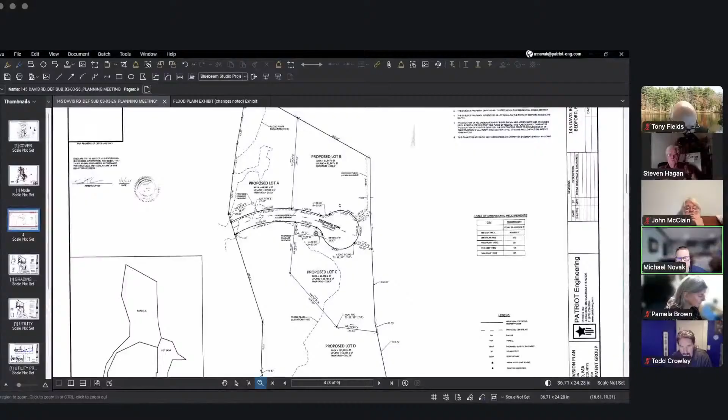Based on those ORAD determinations, and to give an idea of layout, the dark dash line is that floodplain, just in case anyone wants to follow that. Again, Jeffrey Circle coming in through here, we're bringing the right-of-way through and getting it out of the access easement to allow for a better shaped lot.

Slight grading up and down, low points at the beginning of the connection from Jeffrey Circle to our proposed right-of-way, and then we have a low point in the middle and back up. I can show you a profile in a second with drainage systems to capture both of those runoff areas through catch basins and manholes.

We're also taking advantage of as much as we can in regards to some naturally occurring low spots, and we've created some grass depressions here and here because we've been made aware that there's a lot of water issues out in this area, and we've been asked to really try to make improvements above and beyond what's required, so we've really tried to do that.

The result of these two additional grass depressions also allowed me to fully address all the drainage comments from DPW as well, which has been included in this revised set.

The utilities layout is relatively easy because we already have an existing water and sewer line that runs through that easement. We're bringing a water line off to allow us to set a hydrant at the end of the cul-de-sac, services from that, and we're connecting where we can to the existing sewer line as well to minimize disturbance as best we can.

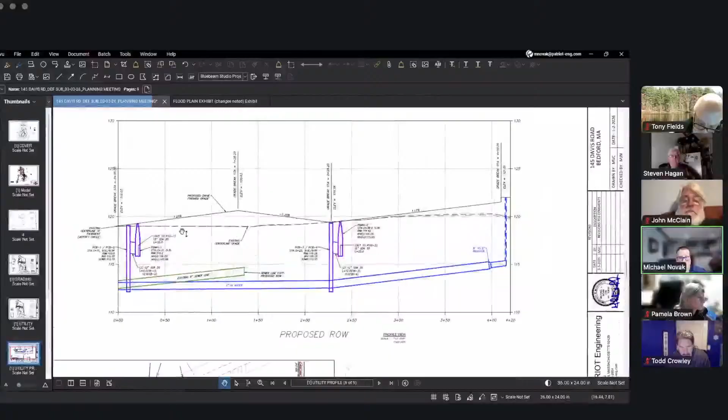You can see the profile here of the roadway. Again, Jeffrey Circle starting here, catch basins prior to leaving the site, high point, low point, 1.25%, a little under 1.5% up and down, and then slightly over 1% to the top of the cul-de-sac. Very, very shallow, very easy.

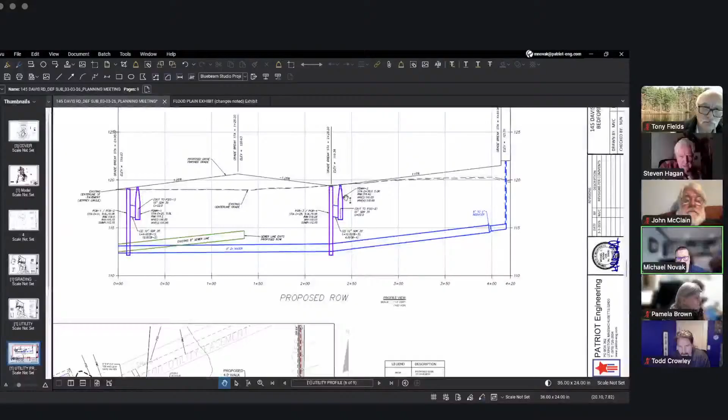Won't have a lot of speed with water runoff, so we'll be able to capture all of the drainage. We're also proposing porous pavement for everything as well to double up on really trying to reduce any runoff or improve any situations that we can with our development.

And we did provide a landscape plan as well. One of the comments looks a little odd because DPW commented that there shouldn't be any trees planted within the existing easement, so we've removed those and added as many as we can outside of that, still meeting regulations. We'll have deed language to make sure that there are no trees planted after the fact in the easement per DPW's request.

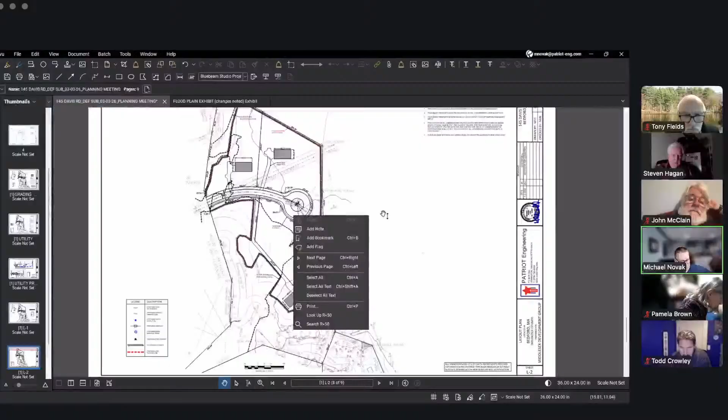We also provided, sorry, didn't mean to scroll into zoom, just an exhibit of a layout of potential building envelopes with driveways. Again, these driveways will be porous to help mitigate drainage, and just an idea of a 65 by 35 buildable area as it sits and how they could sit on the plan outside of the resource areas within setbacks, just for a visual aid to understand, because these lots, especially the bottom lots, are large, and there's a lot of resource area in and around them.

So we felt that would be helpful. I think that's a very brief overview of the layout. Happy to answer any questions. The applicant is here along with Pam, and we have Rich Kirby from LEC if there are any specific environmental questions as well. So with that, Mr. Chair, I'll turn it to you.

Thank you. I'll ask one question and then open it to others. You're saying it's porous asphalt, the main road and the traffic circle, as well as the driveways? Porous hardscape, it's asphalt, yeah, porous asphalt. We really wanted to make a very hard effort to improve drainage with any of this development. Thank you, you're welcome.

Questions or comments from members, from Tony or Catherine? While they're thinking, any from members of the commission? Todd, you've got your hand up.

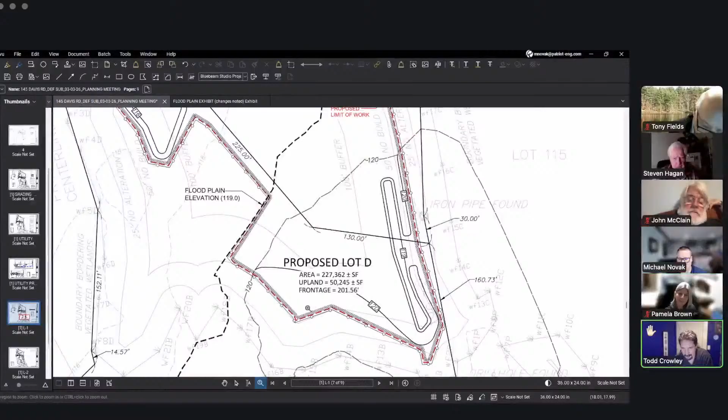Yeah, and I think I asked this last time too, I apologize, but I'm just confused about the lot lines looking at this for C and D down below. So it's like D has a super long driveway, is what you're saying. It does. Again, the effort is to minimize as much disturbance as we can in the floodplain. How large is lot D? I can't read it, I'm sorry. Sure, one second, let me know when you can. Okay, now I can read it, yeah. Okay, thank you.

Okay, Todd. All right, Chris Gittens has joined us and has his hand up, followed by John. Chris, you have the floor. Thank you, I apologize for joining late.

Has FEMA issued relief from this area being within the floodplain? We will need to still file with that. We're trying to get through the revised ORAD, and then that's the next thing that we'll do. Okay, thank you. You're welcome.

John? So this easement runs directly through lot B, right? Yep, sorry, I hit the wrong button. Bear with me one second. It's fine, there we go. Through the middle.

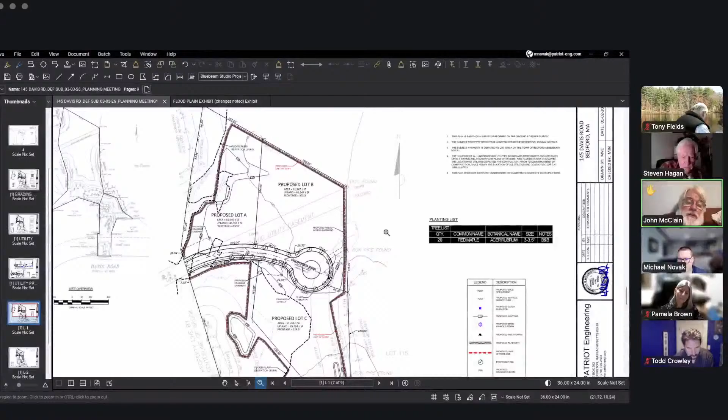I'm not so much worried about the utility part, but I am wondering if the access part, if we ever try to exercise the access part, if that's going to create a problem where whoever owns lot B is going to claim that they never knew and they don't want people traipsing through the middle of their property. Does staff have any insight into how that generally works and what we can do to mitigate?

I can comment if Tony or Catherine don't have a comment. I would just say that the access right seemed a little unusual, and we weren't clear whether it's of any current likely use. I'm not sure if we've delved into it far enough. I think we might have hoped for some comment from DPW about that.

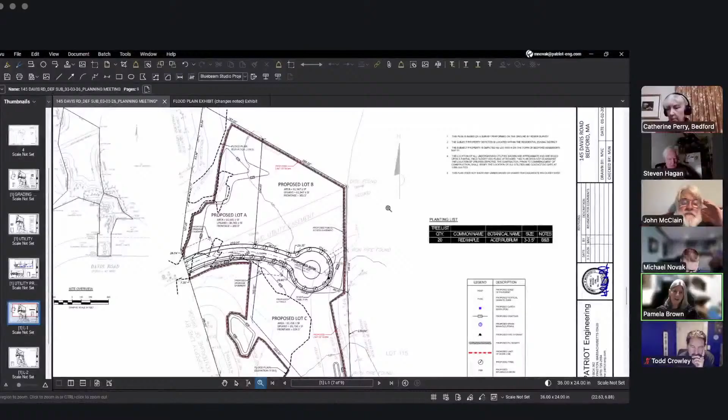Mike, do you happen to have a sheet with the house locations on it? Yeah, that would be crucial. Well, these are possible house locations, right? These are, correct, yeah. Are you not allowed to build on top of the easement, I assume?

You can't interfere with the rights that are created through the easement. So if it needs people to be able to go through it for that width, then you couldn't put anything that blocked it. Okay.

Does someone have two devices on? Because I think that's usually what causes the echo, like a phone and the computer. Well, it seems to be better.

Just a quick additional response to that: you're correct, these are hypothetical proposed house locations that could be shifted. As far as the easement, I actually haven't, I'll have to look for it. I don't think I've read the written easement to see what restrictions there are. DPW has asked, and we've respected, that there be no trees or structures within the easement. But that said, in terms of a homeowner knowing, Mike just alluded to it, but I had suggested, just because of the no tree planting as well as fences or other structures, that we actually incorporate that into the deed. But anytime someone buys a home, you may be aware that there's a title examination run. The easement will come up in the title examination. It'll also be referenced in the deed itself. So people should be aware.

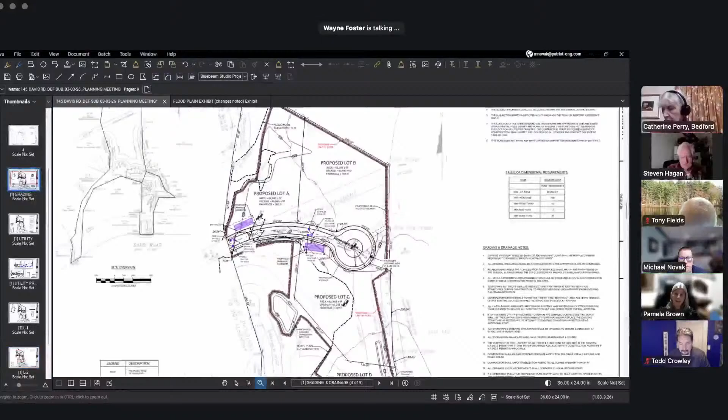I was only saying because I know that Luigi and Lucia at 24 Jeffrey Circle, we don't have sidewalks in front of our houses, and we want to talk to somebody before we put them in, because then we've got the creek and then we've got the rest of the side that doesn't have it. So thank you.

Right, and then your last question - the zoning, which is fairly new, but the current zoning does allow a 2-family dwelling to be constructed on a lot by right. So hypothetically, yes, these could be 4 lots with a 2-family. They'd be townhouses probably on each lot.

Okay, because then you're going to most likely increase the parking situation as proposed on these maps. The driveways are thin, extensive, but total square footage - I don't know if porous asphalt negates the calculation on the square footage, but okay.

Yeah, I'm just concerned about the amount of traffic. I think the town may also have to plan to do tree work more regularly, because in 2025 we had 2 trees come down at different times that closed off this end of Jeffrey Circle. In 2024, 1 tree came down. I know that's not the builder's responsibility, but we may need more tree evaluation.

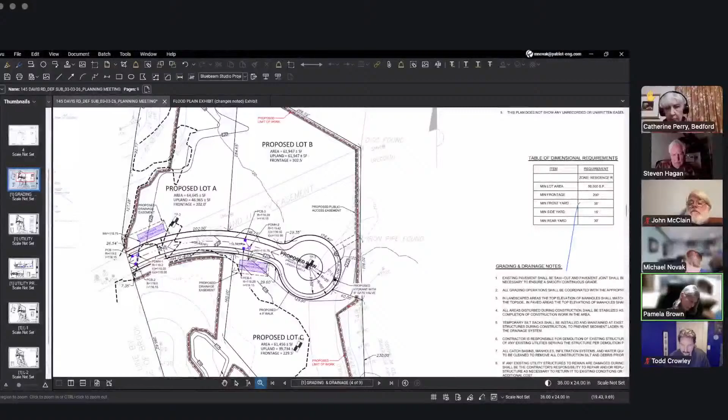Hi, my name is Maria Alice Mastronardi, and I am a resident at 24 Jeffrey Circle. I have a couple of questions.

One is about drainage. Prior to the new pavement on Jeffrey Circle, the water at the end of the road was sitting, so there was a lot of water accumulating on that side of the road. There is no drainage system on Jeffrey Circle on this side - the last drainage is approximately at Madeleine. So DPW, when they placed the new pavement, regraded the road so that it drains properly away from our house. Now my question is whether the catch basin is enough to collect all the additional water coming from the new subdivision, because it is a lot.

And why didn't you consider a drainage system towards Davis, for example, or towards other areas? The other question I have is during construction - I'm wondering how the road is going to support all the construction vehicles, because the new grading is pretty much what is draining the road at the moment.

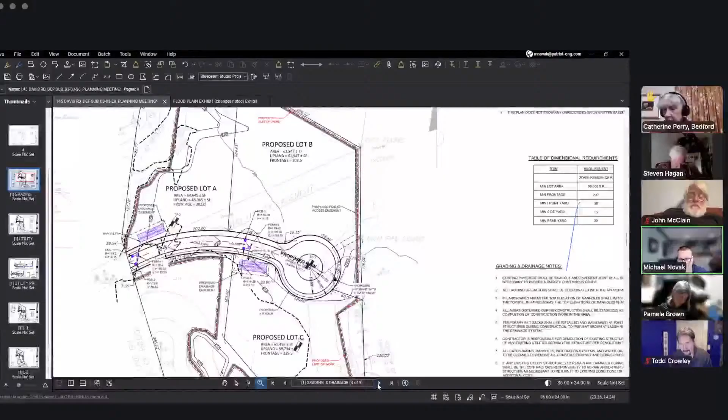If I can jump to this, you can see that only about the first 125 feet of the road actually pitches back towards Jeffrey Circle. The rest of the road all pitches internally. So we're only talking about the first section, basically from right here forward - the entire road does not go towards Jeffrey Circle, it's just the first 125 feet or so.

And again, based on the shallow slope and the porous pavement, there won't be a lot of velocity in that water. The catch basin should be able to handle anything that does make it to the end of the road.

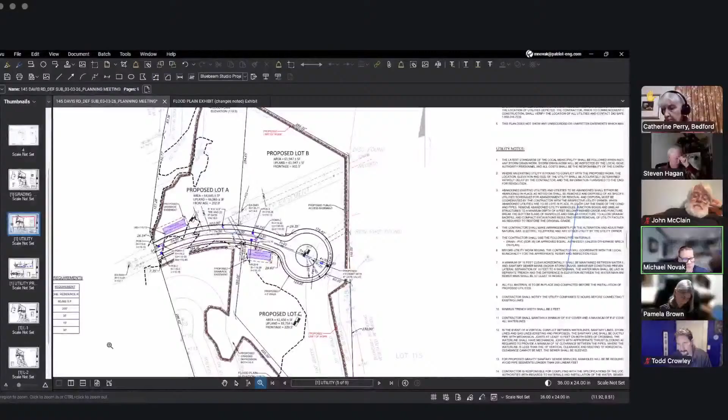Now during construction, obviously there won't be catch basins immediately. We have proposed - I believe I have that plan - a construction entrance and a turnaround area for fire trucks. That was one of the comments we got from fire and DPW, to allow any emergency vehicles in and the ability to turn. We've also dedicated a parking area for construction vehicles to maintain that access.

That small section of entranceway, the construction entrance, will certainly dissipate any water coming that way. But during this time frame, the drainage will function as it exists now - where the water goes now, it will still go there until we get the roadway in. We can certainly make sure it's pitched so there is no runoff, or at least minimize as much runoff as possible towards Jeffrey Circle during construction. This will also be monitored on a weekly basis because of conservation issues. So there's some safety and some belt and suspenders built in.

I apologize, I don't remember the last one - I think it was tree work in Jeffrey Circle, something along that line. No, it was about... Thank you for answering my question.

Sure, it was about the narrow road. I remember that there's an existing regulation where Jeffrey Circle is already longer than normal - it's already an exception - and that will be made even longer and narrower. So this would be an exception, and I was wondering, would we still be able to guarantee safety with this new addition?

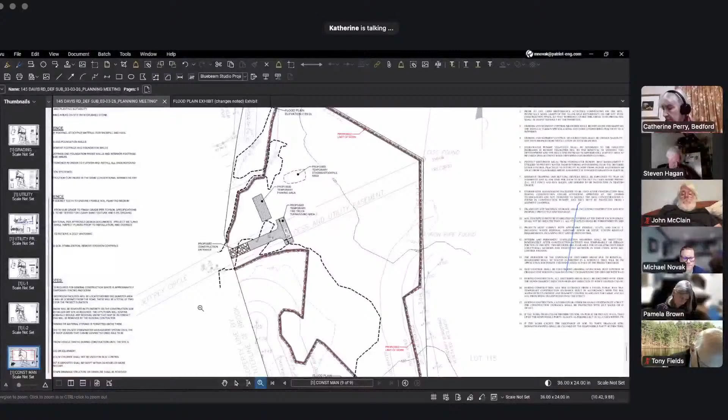Okay, so I just want to highlight the conditions that I put in place that the board will take into consideration before granting any approval. Yes, we will. This is a question for Mike, because we spoke directly about water mitigation. My biggest concern is not so much the stormwater runoff, but mainly when the Concord River floods, this area tends to get flooded into the whole neighborhood. So what has changed since we spoke about mitigation?

Sure, happy to. To confirm, we did have an offline Zoom to review in depth the drainage and how this would function, so they could feel more comfortable understanding the plan. Since we've spoken, two things: if you recall, there was a small grass depression in this area, and with the floodplain change I've actually created a larger area. So anything running this way is going to get settled in here, and I've added storage - drainage storage, or water storage, flood storage - all through here.

Which is larger than what was previously proposed. In trying to address those efforts, I added this mitigation here as well - again, it's a grass depression, and really what that means is more volume, more storage for water to stop and stay here, or to come this way and have a place to go without rising around. We are limited in how much area we can disturb within the floodplain, and I've come very close to that number, but stayed under - there is a limit. So I've tried to really increase flood storage beyond what's out there now, while staying within the bookends we have to stay in for development.

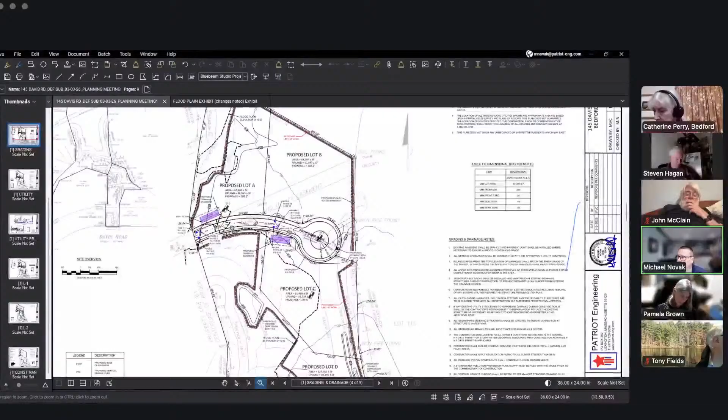So those are the two big changes, along with - I'll reiterate - we've really tried to take the water into the ground before it can run off and create any additional flooding or contribute to any other low spots beyond the site. We're reducing runoff pre to post for all directions that's required. So that's kind of the overview. We've definitely tried to make some improvements and take into account your concerns.

Okay, thanks, Mike, for that.

Follow-up question to that: I appreciate that you added a depression by Lot A, Lot B over there. My concern is that depression closer to my property down on the bottom, because our property down here is already the lowest point. So more water coming down here would not be something I am comfortable with. I would be more comfortable if you tried to look at options to divert the water where the cul-de-sac is and further out east of there.

So if I could, that isn't necessarily because I'm directing more water in that direction. It's to create the ability to hold more water in that area, to alleviate any water coming towards you. That was the intention of that. It's not necessarily something I need to make my drainage work, quote unquote. It's more about trying to address your comment and allow for more storage on our site to alleviate, or hopefully alleviate, any increase that you would see on your end, if that makes sense.

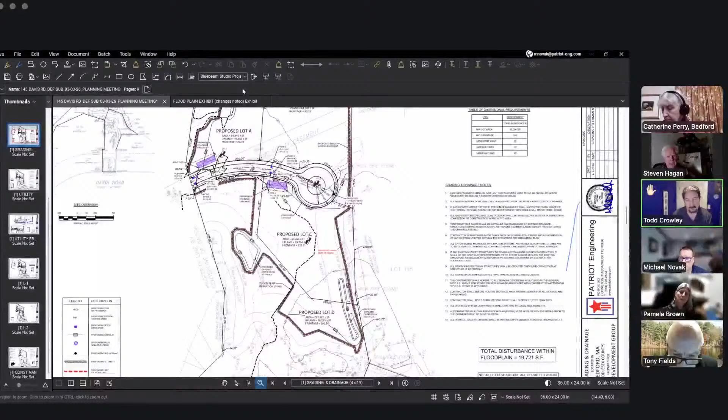Well, I think what we're doing is moving to continue this to the April 9 meeting. Between now and then, the applicant will notify us if they feel fully prepared to be in front of us. If that's all true, then will the applicant agree to continuing this hearing to the April 9th meeting of the planning board? Yes, we would like to continue.

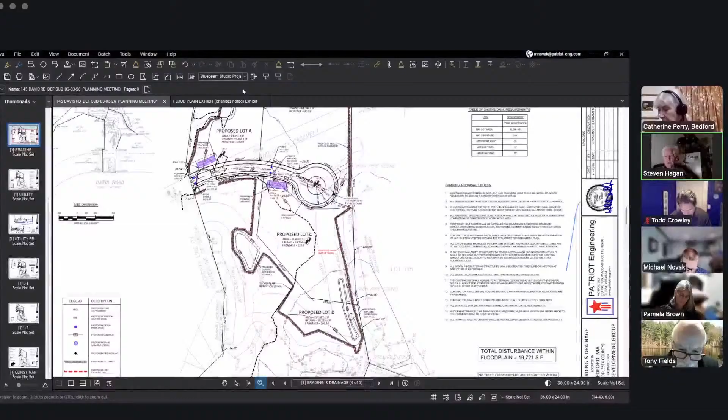Okay, all right, I need a motion from a member of the board to move the hearing for 145 Davis Road subdivision plan to the April 9, 2026 meeting of the Bedford Planning Board. So moved. Thank you, John. And a second? Thank you from Dawn. And roll call vote in that order: John? Aye. Dawn? Aye. Todd? Aye. Remote participant Chris? Aye. And the chair votes aye.

All right, so we will see or hear from many of you in about a month or so. In between there's town meeting, town elections, and all sorts of stuff, and the ConsCom meeting tomorrow night. I will see some of you tomorrow night. Yeah, I think I recognize you, Rich. I may be seeing you tomorrow night. All right, thanks, see you tomorrow night. Thank you. Yeah, you bet. Right, yeah, no, I've read over it already quite a bit.

229 Old Billerica Road, 6 Michael Bitkin Way, request for release of a lot from covenant.

Who would like to speak on this subject? Or who is going to, whether or not you'd like to?

I will. I think, given where we've been with this, it makes sense. I didn't see a huge issue personally with removing this lot from the covenant. But the related issue is what I had originally wanted to do when we filed this back in November: two steps. One was to remove the two lots from the planning board covenant for financing reasons and others. But related to that is the anticipated amendment request to the special permit, which would include removing both of those lots from the PRD special permit.

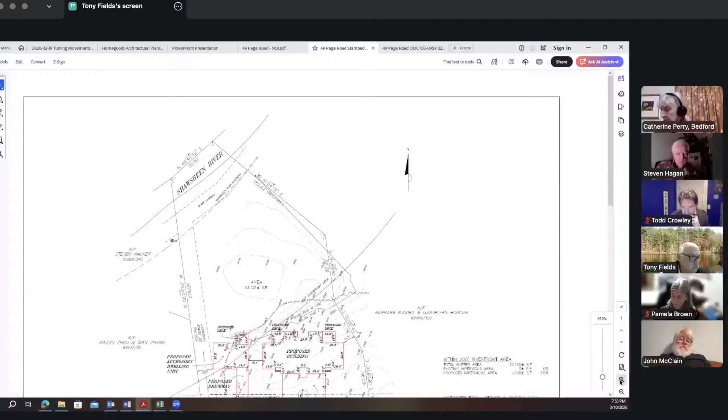The existing house will not be torn down. It's a cape. We are looking to add the driveway on Page Road for the ADU. It'll be a combined driveway for the two-family existing house, so there'll be two entrances for that lot, and that is one of the requirements from the DPW.

This lot does have a sewer easement on the side, and there is also a sidewalk easement that was just given to the town from the homeowners to put in a sidewalk up to Hemlock Road, which will be a pretty desired area because it is a busy walking path for residents.

The ADU that we are looking to build is going to be 1,000 square feet, and it will have a single car garage, about 14 by 20 feet, and the ADU height will be 23 feet high. It's a single floor unit. The reason we were able to go to 1,000 square feet is we're looking to meet the energy code, so we'll build it to a higher energy code for the HERS rating, and that's why we're allowed to go the extra 100 feet on the square footage compared to the standard 900 square feet.

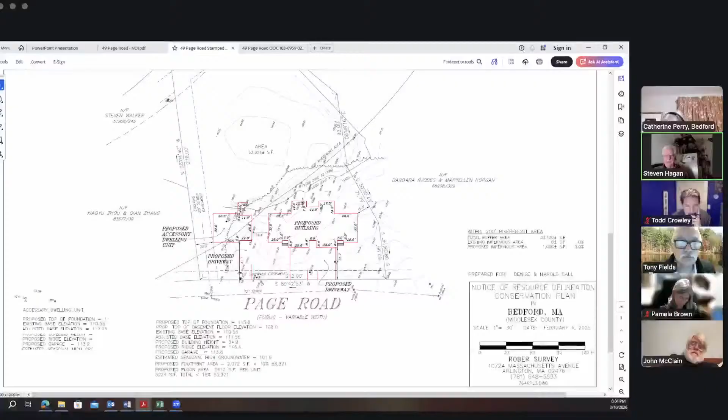Thank you. Questions or comments from members of the board? Questions or comments from other residents of the town? I'm not seeing any hands up. All right, what step do we need to take on this, Tony? I was struggling with that — is this just an approval of what?

Yes, this is site plan review of the placement of the actual accessory dwelling unit. We would often recommend it be placed behind the main structure, but because this property backs up to the Shawsheen River and has wetlands in the backyard, placement of this particular ADU makes more sense environmentally, positioned somewhat parallel to the main structure, and that's why you see it here.

If the chair doesn't bring it up — the Conservation Commission did review this proposed construction and approve it at its last meeting in February.

If there are no other questions or comments, is there a motion to approve the aforesaid project site plan review? So moved, thank you John. A second? Way to go, Todd. All right, in that order. How do you vote, John? Aye. Todd? Aye. Don? Aye. Chris? Aye. And the chair votes aye.

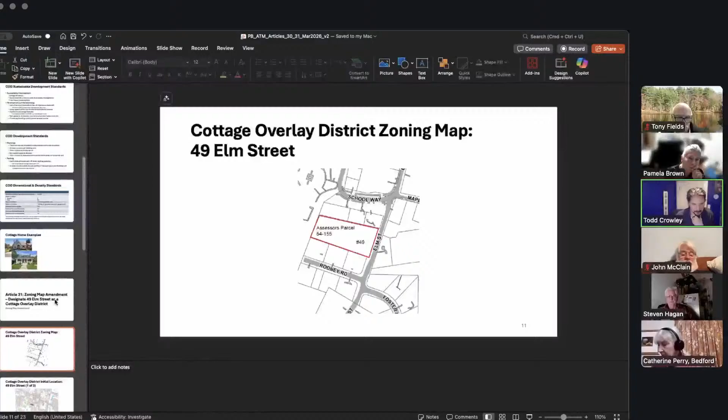Okay, thank you. And you have slides, Todd? I do, and this is probably my second question, but I'll get there. So there's not a lot, obviously, but this is the exact map that would be entered into the bylaws, showing 49 Elm Street. I just wanted to contextualize it a bit in terms of the Great Road going almost east to west here, and it's south of that, so very much in the center of town.

And I don't even know if this should be in there, but this was in the original proposal for us as well. So it's a question to the board: does this go in at all? Do I try to request backup slides?

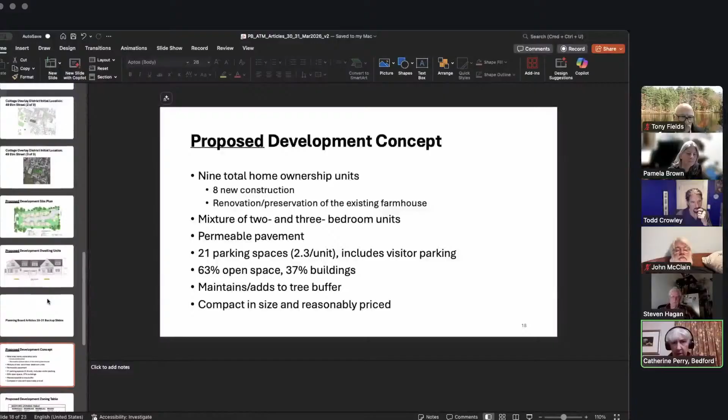I think it's good to have that information, but Catherine? Yeah, I wouldn't provide so much detail about this proposed development concept, because as we said, that's not the zoning, and something different could come forward. So I'd focus on the specific requirements in the zoning, which covers a lot of this — it overlaps anyway. If you find you want to show the development concept because people are asking about it at town meeting, I wouldn't go beyond that.

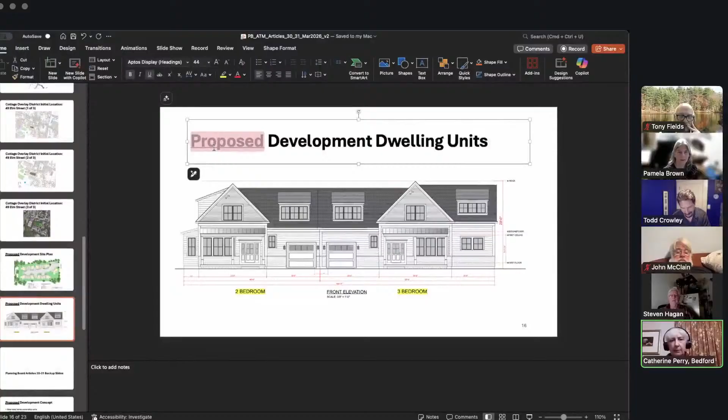So you just keep these two slides in the deck, versus the detailed slide of bullets. And then would you rather say 'proposed,' or actually have it just say 'conceptual' or something like that? Conceptual might work better, making that clear. I can't spell — is that right? Much better.

And I don't have to underline it or anything like that either. Right.

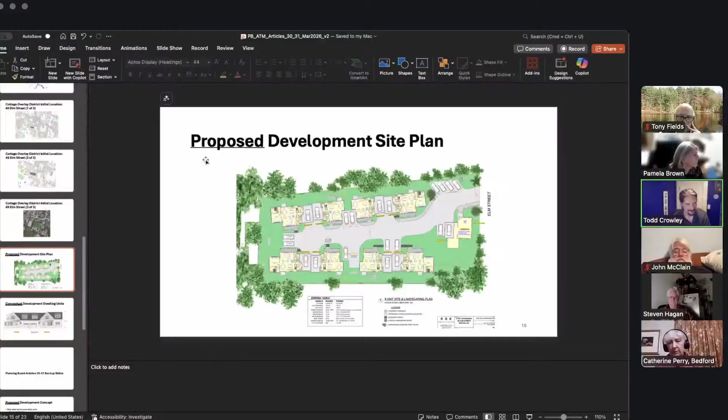Tony, I don't know if you could send these out and people can comment to me in terms of word choice — I'm always looking for feedback on that. Yeah, we'll send the slideshow around for member review and comment before we finalize it.

Okay, and Pam, if you can give me that data, I'll at least have it. I may not display it right away — I may just talk about it and then...

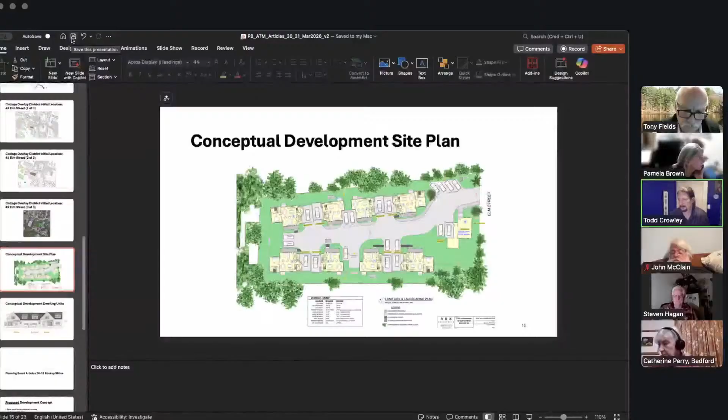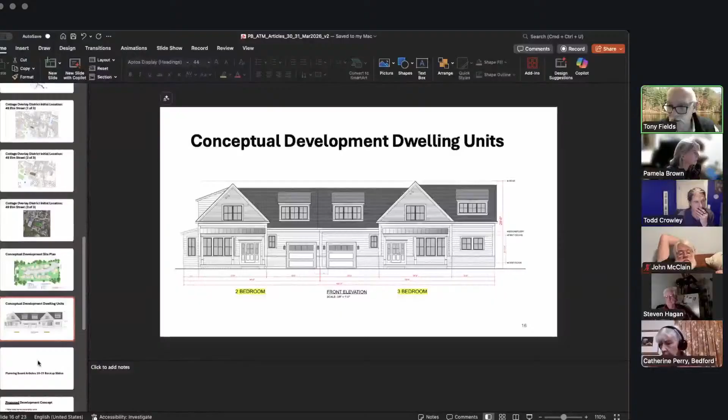I think it was Chris at a prior meeting who showed me one of those apps or websites that was really cool, but I actually just went around the neighborhood and calculated the density based on the number of units on the lot and the lot size from the assessor's records. I think Chris referred to the residency software that's been made available, which will also provide density data wherever you draw a boundary.

Yeah, I think we need to be careful with that, because it was used when we did the multifamily housing overlay district by a presenter and it wasn't always accurate. No, I did one that's very specific to Bedford, lot by lot.

Even if we have a range — I don't know if planning can help with this — it doesn't have to be on the slide, but in terms of, okay, the max density in that neighborhood is 13 units per acre. If you don't mind me sharing my screen for a sec, I'll show you what I have, and then I can send it to Todd. Sure, yeah, sure.

Oh, I might have hit the wrong button. No, I think we're good. So, there we go. Can you see that? There you go — sorry, I had to stop sharing. Apologies. I think I'm sharing, can you see it? Yeah, yes, your map is up. Yeah, so I just literally ran around lot by lot and put numbers on here.

But I think what's important here is, there's clearly a range, but the density at 9.3 units per acre isn't really that far off from the existing neighborhood, and there are other more institutional uses right next door too.

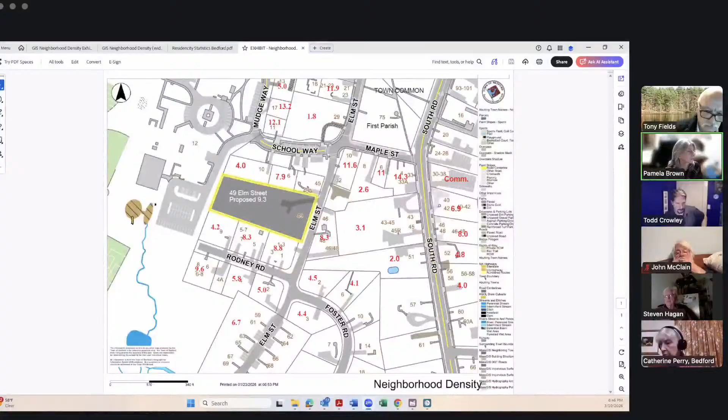Any more discussion on this topic? If none, is there a motion to close the hearing? I move to close the hearing on Article 31 of the Cottage Overlay District. Thank you, Todd. Is there a second? Thank you, Don.

How do you vote? Todd? Aye. Don? Aye. Chris? Aye. John? Aye. And the chair votes aye. Hearing is closed. So now we need a motion to recommend this to town meeting.

Is that what we're doing, Tony? Yeah, okay. If somebody wants to say so moved? So moved. Second, thank you, Don. And second from Todd. How do you vote? Don? Aye. Todd? Aye. John? Aye. Chris? Aye. And the chair votes aye.

Well done. We've gotten through, I think, almost all the hard stuff already tonight. And it isn't even midnight.

All right, I think, oh wait a minute, we need to do another public hearing. One more public hearing. Is that the one on unregistered, or what's the subject? Yes. So we've decided this is going to be a public hearing. Well, I mean, we don't get to decide, it's state law that we have to have a public hearing and take a vote on it.